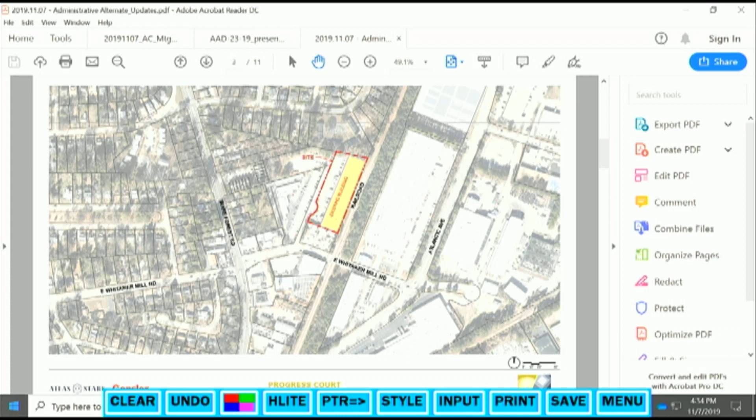As the applicant, we are taking a warehouse that has been light storage. It's pretty basic Butler building, built in 1980, all brick clad. You can see from the site plan, it's hemmed into the site pretty well. There's some obvious limiting factors with the property lines to the north, south, and east. East is a railroad, so it's made it difficult to locate some of the utility service entrances and the location of items like trash.

We're trying to enhance the building with considerably more openings for future office and food and beverage tenants. We are adding in some new materials, some black steel, some wood elements, and the proposed enclosure tries to tie into that materiality. Not a whole lot more to add to the description. It's pretty straightforward warehouse conversion. We're trying to keep some of the character of the original building intact and bring it into the 21st century, but it's very limiting with how some of the utilities, as we upgrade things like power, gas, water, can actually enter the building.

Hi, Kristen Stanciel with Stewart. I'm sorry, 139 Daneborg Road, Durham. Thank you.

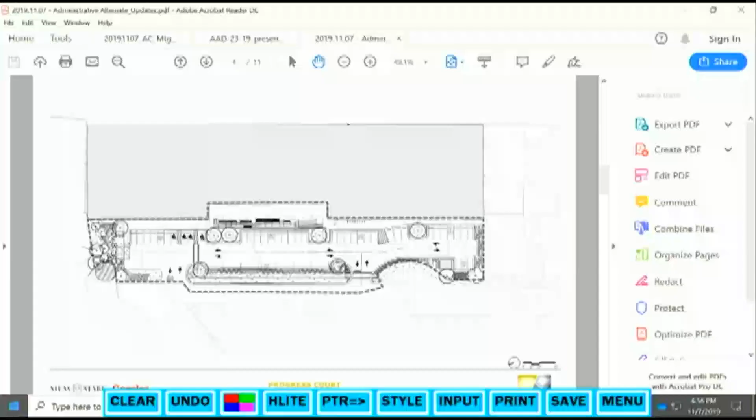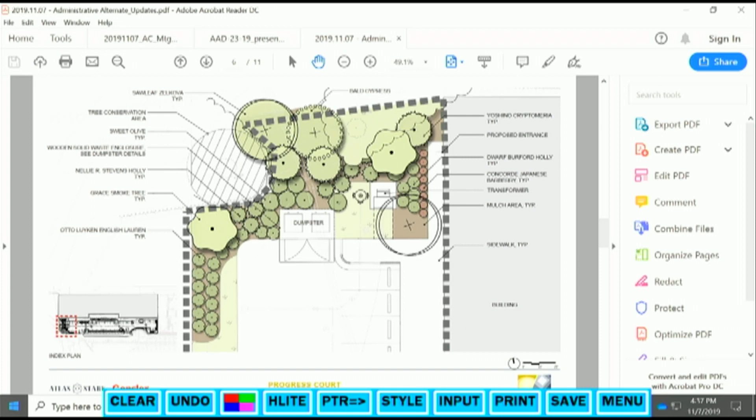This is a revised planting plan that shows some enhanced landscape, some added evergreen mid-size vegetation. The owner wishes to remove the pines that are existing and leave the hardwoods. The pines are the majority of the trees on the owner's property side of the berm, so we would be proposing to replace it with cryptomeria and some fragrant osmanthus to try to offset any smell from the dumpsters.

I'll go back to the section, but these are some of the plant images. The cryptomeria would go in, we're saying at a minimum of 8 feet tall, and then some Nellie Stevens holly. We're proposing a 12 to 14 foot tall cypress, just trying to get some height in there. The Zelkova is a hardwood to tie in with the landscape of the proposed parking area.

That is one of the vehicular trees that are required for the parking area. And then you'll see the osmanthus and the Burford hollies.

I'll go back to the section. This was something that was requested just to understand the view of the apartments. They are one-story apartments, so they won't be getting a significant view downward. And then again, with the added vegetation and the wood enclosure that ties in with the wood to the building, we think this would be a substantial improvement to the existing condition.

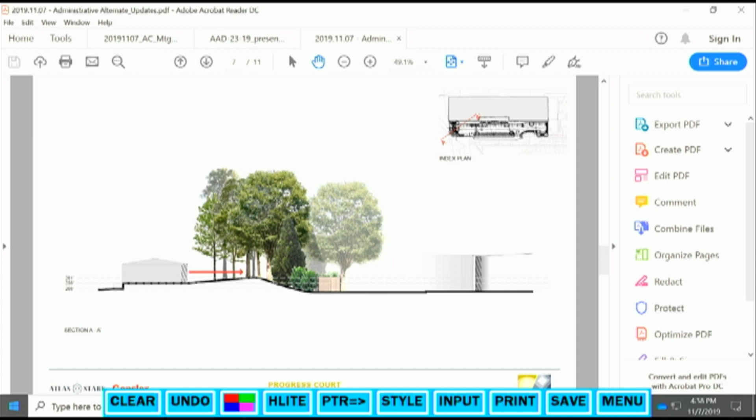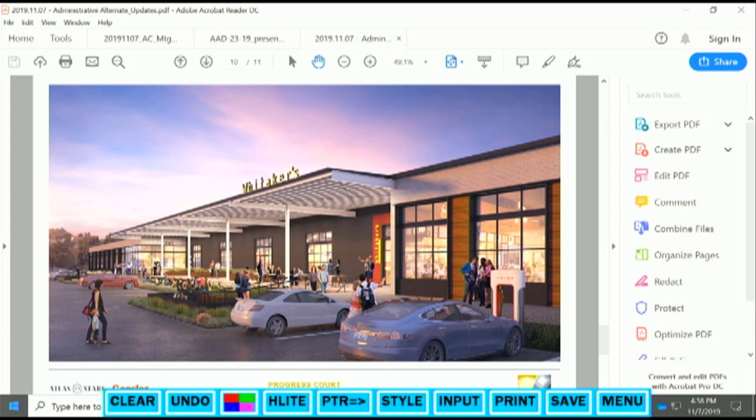And again, this is the proposed enclosure. And then we've added a rendering of the proposed building that shows the wood on the exterior that would look like the enclosure.

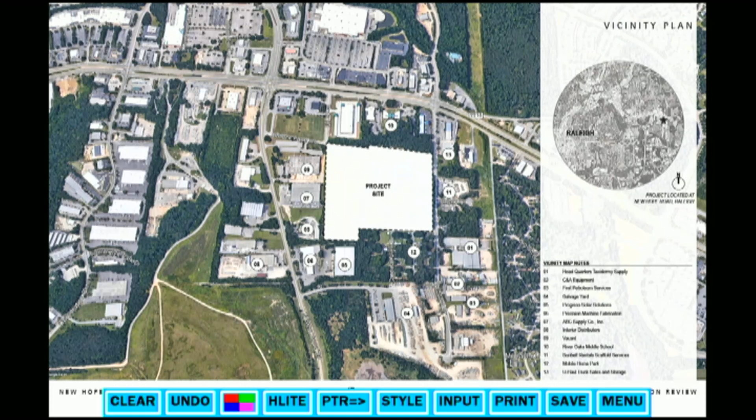So our building footprints are similar to what they were previously. We have added a little bit of a notch to the south of Building 1, and that was based on some building setbacks that we made that change. Otherwise, most of our changes have been in terms of the elevation.

Additional things that we have added for clarification in this version of the drawing is showing the connection to the future Bullock Farm Road - I think that was one of the comments last time. And then also showing more of the landscaping and things that would happen around the building.

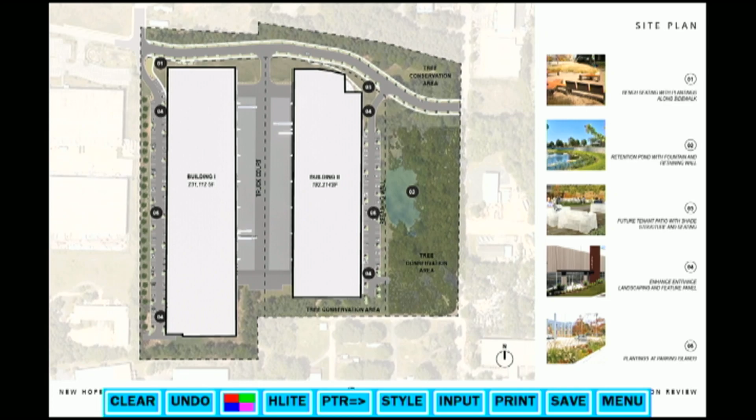So this is just an aerial showing both of our buildings. And again, our placement on the site is based on trying to keep the loading dock area and trucks internally focused, and keeping the more pedestrian-oriented spaces, offices, windows, things like that, facing out from the site.

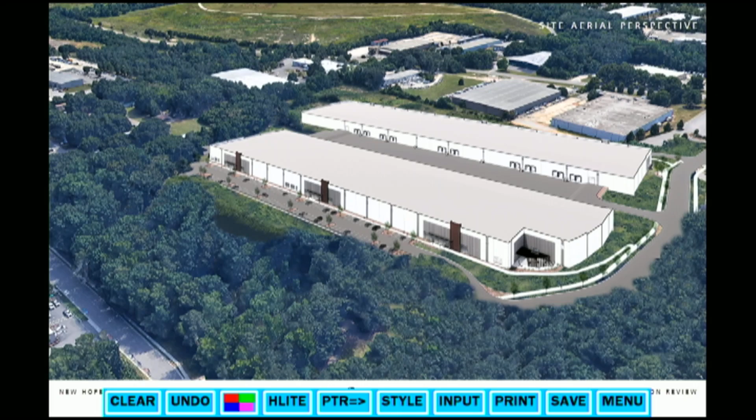So this is Building 1. This is showing benches and seating on the left side of the screen that would be along the future Bullock Farm Road, as well as access from the sidewalk in front of the buildings up to the road, and then parking, enhanced landscaping at each of the entries.

And on the elevations, probably one of our biggest changes - we heard from you guys last time that we need to do more clerestory glazing on the north facades. It shows that we still have the same percentage of glazing because it's only measured up to 12 feet, but we did actually increase the amount of glazing, adding those at the clerestory along the north facade.

Which I think is going to give more daylighting - I believe somebody requested specifically for workers and things in the warehouse - but also will be high enough that it won't affect racking and storage for potential tenants. So that was one of the changes we made to the elevations.

Another change that we made was respective to the relief of the panels. I know we discussed a little bit last time about the tilt panels, the thickness, and maximizing what that depth is we can get to. Working with our structural engineer, they recommended pulling it back 1 and 3/4 inch, and then also doing the form liner beyond that.

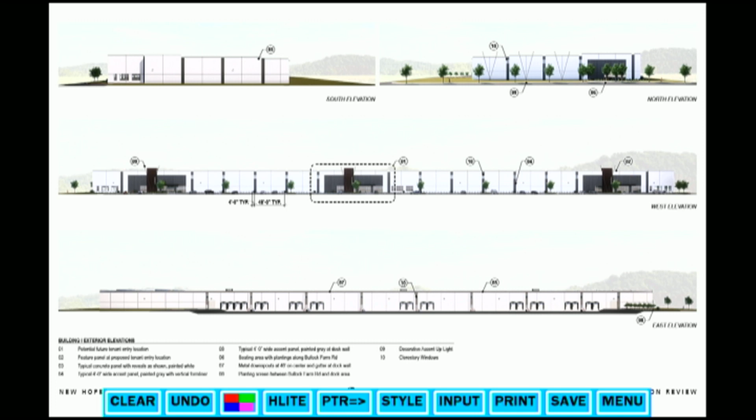One of the other comments we had was on lighting, or doing something else to help add interest. So the dash lines are intended to be uplights - if you look at the north elevation, along those facades you'd see right along the street. Also adding those at each of the entry markers, in addition to our regular wall-mounted lights, and then canopy lights at each of the entries. So that'll give a little more security at night, but also a little something extra besides just the paint finish on the walls.

This is showing building 2 with what we're proposing as a future tenant patio build out at the street. Again, one of the components we intentionally put in the design was following the setback of the road, so this building is curved to follow the setback of Bullock Farm Road. Similar to the other building, it's aligned along that setback, adding recesses and interest for future tenant use and bringing some lighting further back into that space.

I should note, what we're showing as glazing in this corner, the lower portion you're seeing, we're not including in our total towards our 12% facing the view, because it's technically on the east facade. But between that and our clerestory, I think we would be, but I wanted to hold true to the requirement asked, and I've only measured it 12 feet up on the north facade.

This is showing the elevations for that building with similar changes in terms of relief, lighting, and also showing the loading dock spacing.

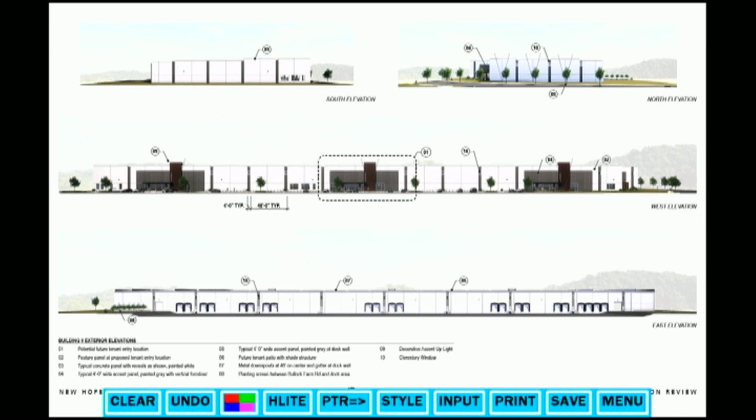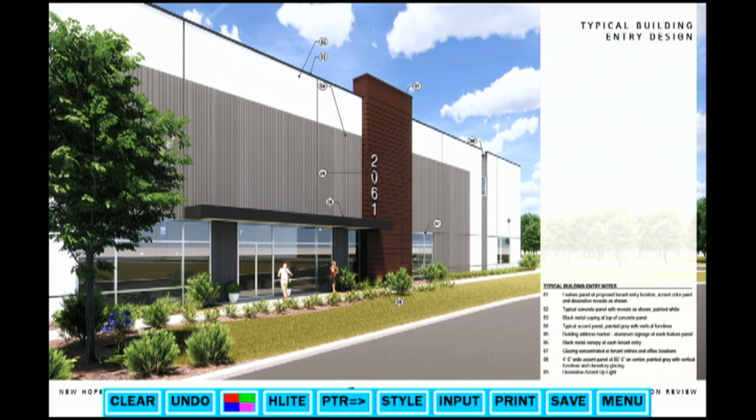One of the other comments we had last time was a concern for landscaping and bringing that up closer to the building instead of just at the parking islands, I think is what we were showing. So this view shows our intent to have denser plantings and landscaping up at the entries specifically, and then of course along the building. But doing as much as we can in the areas where it seems like people will be going in and out, or spending time outside, maximizing those areas.

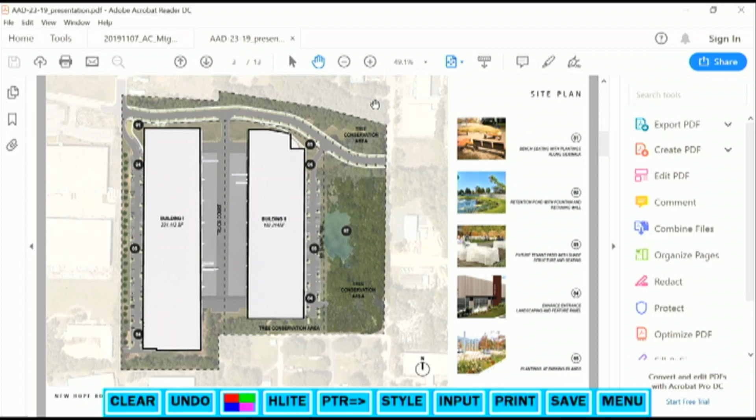I apologize, that's misleading based on this view. It's a top-down rendering, so it's showing the roof out a little bit. There is actually, I believe, 10 feet of landscaping between the sidewalk and the building. That's just not being represented well here, so I apologize for that.

And is that the same on building 1? Correct. And building 2? Yeah, that's in addition to the landscape parking islands.

So you all discussed the amenity space previously? Was that part of the comments before? I wasn't at that meeting. I don't know how much conversation we had about the amenity space, if you want to ask for clarification.

I'd like some clarification, it says in lieu of, they have provided additional amenity space. The applicant is also proposing additional sidewalks, landscaping, and amenity spaces between the building and the street. Are those the benches you mentioned? So the amenity spaces, we tried to make the recess with the future tenant spaces a little more robust on building 2. That's why we added the park bench area with additional landscaping for building 1.

I see on the site plan, number 2, retention pond with fountain and retaining wall. The image shows a path going around it, but I don't see it on the site plan. Is there a hardscape path around that, or is that a grass strip? Are you asking if there's a path around the retention pond between the pond and the retaining wall? Right now, I believe we just have the retaining wall adjacent to the pond with a fountain. So the parking is up above that, and there's no access down to that area, correct?

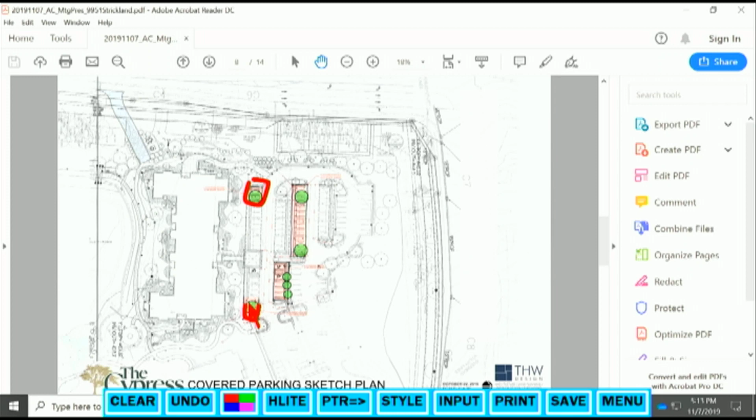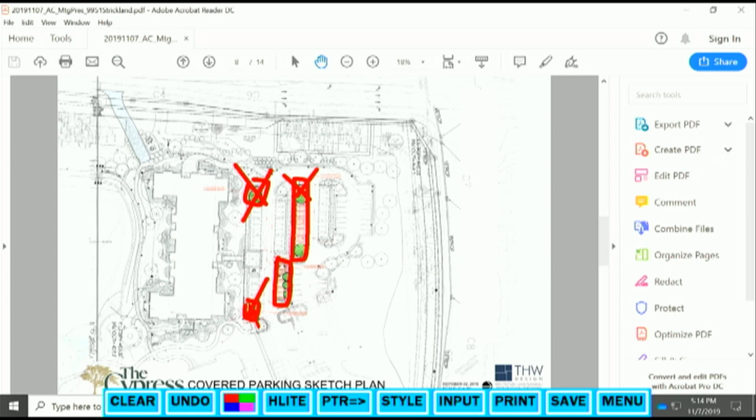What we are proposing is to add 2 spaces under the covered parking here, 3 spaces there, putting this entire row of surface parking under covered parking, and adding covered parking to what was shown as surface parking at that location. What that will do is remove 4 large trees at these 4 locations, as well as some smaller understory trees there.

We are proposing to relocate those trees, which are shown on this plan. You can see the 4 large trees here on the north side of the surface parking, and the 3 small understories - we'll add those to those islands.

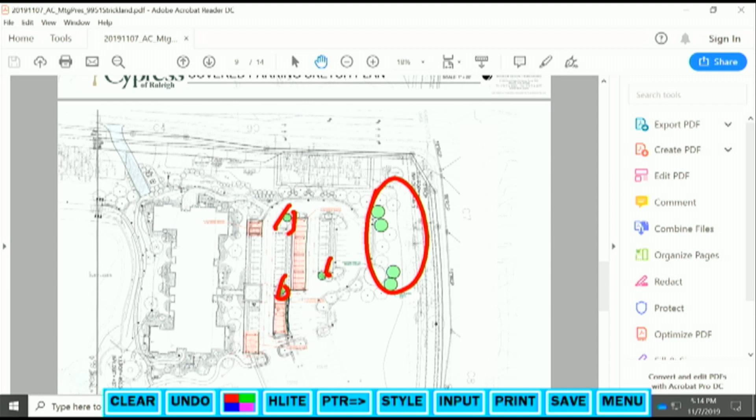Just to give you also, there are some pictures to show what our existing covered parking throughout the development looks like. There are 5 villas - we're working on number 5 - and these will give you an idea of the existing covered parking areas with the villas behind. This will be the same type of covered parking that we're proposing. You can see they're still very heavily landscaped and blend in very well with the community.

We believe that covered parking is important for this type of development catered toward the elderly, where often there are people using walkers and wheelchairs, and keeping them under cover we believe is important. So that is really why we're making this request to you.

Going through - I think there is another slide there. Just to orient you back again, I believe there are some photographs here in your packet. Let me see if I can... will those blow up a little bit? There's a zoom... will that work? Let's try that.

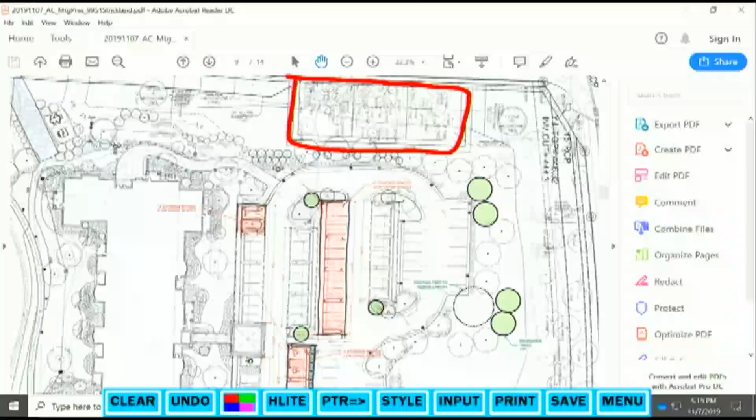Those aren't trees being taken down. Oh, we're not taking any trees down on the frontage. We have tree conservation, primary tree conservation along Lead Mine Road. We have all this existing area.

For some reason I was thinking you were saying in order to do new covered parking, you are removing certain trees and cutting them down. Oh, no, not at all. I had the same interpretation, and I was like, no, this isn't built yet.

All the street frontage on Lead Mine and Strickland, we are not touching. Just internal trees? Correct, internal. Okay, let me ask for clarification then. Are there trees existing internally that are being cut down to put the covered parking in place?

No, nothing that hasn't already been removed. We did remove some trees, but they were allowed to be removed in order to put in this development and the parking lot itself. But you're developing the site currently. Correct. So it's not like there's trees in parking islands that you're taking down to do this? No, there are no existing trees in the parking areas.

Okay, thank you, that was really confusing. All we're proposing is removing... like when you were X-ing them out, you were like, we're taking these out, and we interpreted that to mean cutting them down, but they don't exist yet. So X marks the spot.

Also, you had 4 beautiful big trees highlighted there, and I was like, are those the ones leaving? So we were just showing those for the ones that we were going to move from point A to somewhere outside. They were planned for point A. That's the difference, moved, not removed.